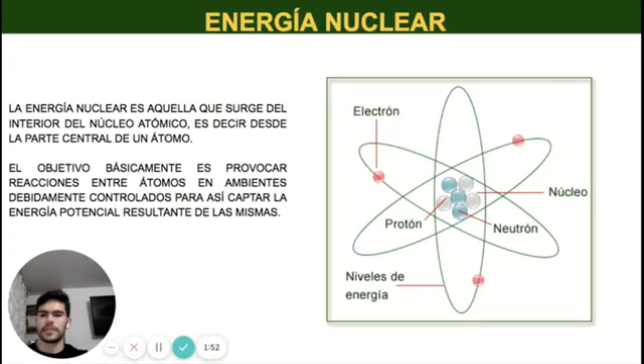When one of these two physical reactions occurs, the atoms experience a slight loss of mass, which is converted into a large amount of heat energy, as the scientist Albert Einstein discovered with his famous equation E equals mc squared.

So the principal characteristic is obtaining generalized radioactive waste, hard to degrade and very harmful. Some of the processing residues have high application in nuclear medicine, radiology, even in high power nuclear weapons. These are known as gamma rays, beta radiation.

Radiopharmaceuticals. However, these industries, such as nuclear medicine, are also guilty of producing nuclear waste with high impact on humans. On the other hand, high-level waste is waste with a concentration of radionuclides such that thermal generation must be taken into account during storage and disposal.

This type of waste is obtained in the power plant. It is removed from the reactor to be temporarily stored in a pool of water built with concrete and stainless steel walls inside the plant to create a radiation barrier and prevent leaks.

In addition, efforts are made to reduce the volume of this residue to the maximum through distillation, evaporation processes, or even by subjecting it to volume reduction by means of external pressure. That is, a volume reduction is applied to its maximum capacity by inducing physical and chemical changes.

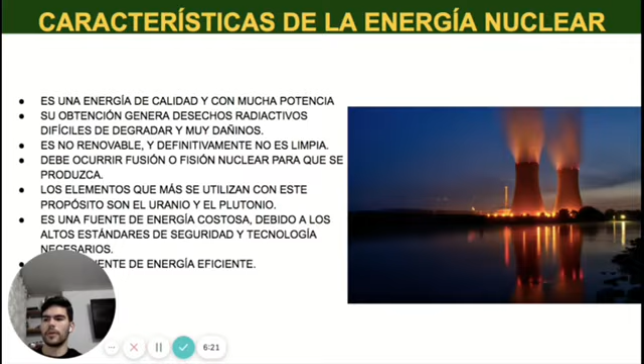All the technology behind a nuclear process is of extremely high value at an industrial level, since the software used for control and in case of emergency of the plant is quite complex. For this reason, it is also a source of expensive energy. Energy classification.

This type of energy usually divides between nuclear energy produced by fusion and fission of molecules. Fusion is the union of hydrogen and its isotopes, which are deuterium and tritium, to form a new heavier element like helium. Fission is the reaction in which the nucleus of a heavy compound is disintegrated by the capture of a neutron, and its division produces two lighter compounds and the production of energy.

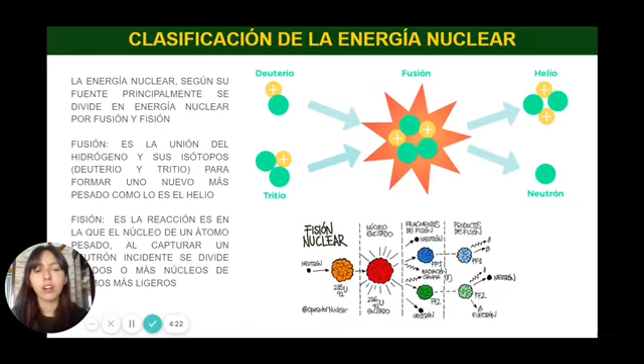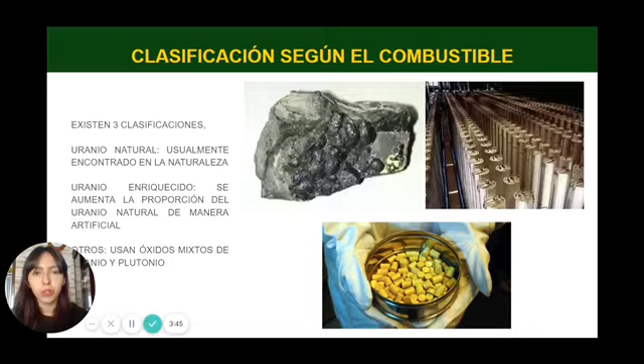The enriched uranium is artificially augmented to approximately 5% concentration of natural uranium. We also find mixes where plutonium and uranium are combined in the form of oxides.

According to velocity, there are two types of reactors. The first is the rapid or fast reactor, which uses a catalyst where activation activity is decreased, and the pressure and temperature specifications are lower than the thermic one. In the thermic reactor, we use the velocity produced by the increase of temperature; it's a slower reactor, but there are many conditions that must be considered when making it.

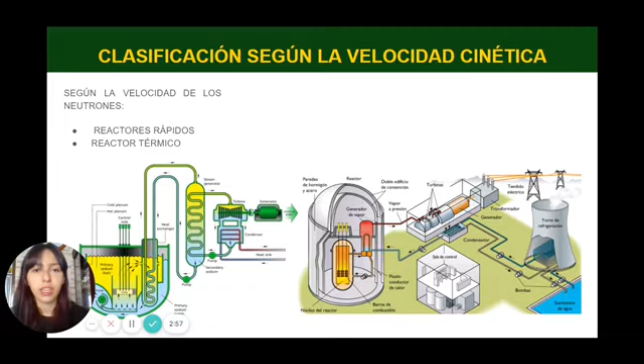According to the moderator or refrigerant, there are three classifications for moderators: heavy and light water reactors, and graphite reactors. For the refrigerant, there can be gas such as helium or carbonic anhydride, and water, light or heavy. These materials can also function as a moderator of neutrons.

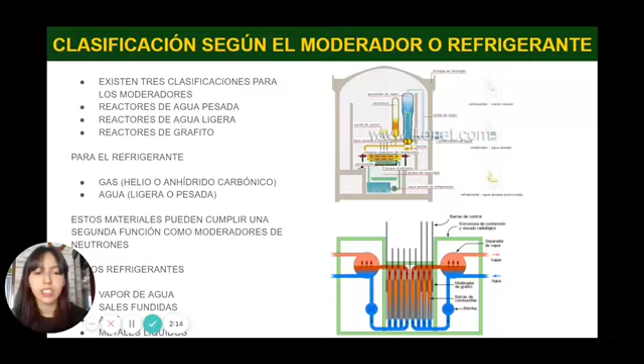For the refrigerants, there can also be gas and carbonic anhydride. Other usual refrigerants are water, steam, molten salts, and molten metals.

The applications of nuclear energy are very broad, but we are going to talk about the five most important. Energy production is the application of nuclear energy that is most exploited, since it is a basic, very essential application today. We also find application in industries, mainly to verify the production process and know what errors can occur.

On the other hand, we have military weapons, which throughout the history of humanity have been deeply developed and perfected.

In the field of medicine, we find the usage of nuclear energy to be very important science, which allows it to be used to carry out diagnostics and treatment of disease.

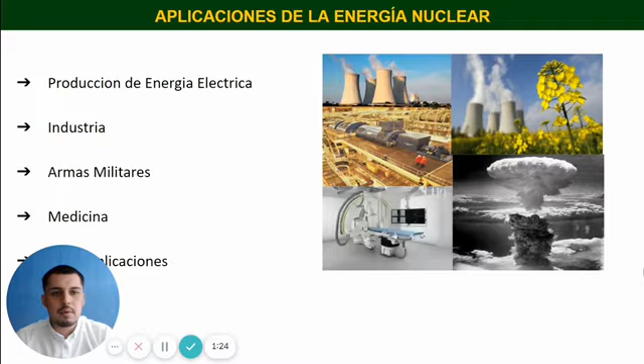Finally, we have other applications, such as agriculture and the environment, where the fundamental use is found throughout the world.

Energy production: a nuclear power plant has the objective of transforming the internal energy of uranium atoms into electrical energy. This process follows the following steps. First, a nuclear reactor generates fission reactions that emit a large amount of heat. With this thermal energy, high pressurized steam is obtained.

The steam, with its pressurized heat, drives the plant's steam turbines. In this way, mechanical energy is obtained from the rotation of the shaft. Finally, that energy is transformed from mechanical energy into electrical energy in the electrical generator.

In the non-renewable part, we refer to an electric generation system using non-renewable energy sources that are used over time without return. Among the sections of non-renewable power plants, there are nuclear power plants and thermal power plants that generate electricity. The thermal power plant, which uses coal or fossil fuels, also takes advantage of the calorific power in the fuel, generating pressurized steam that drives turbines for electric power generation.

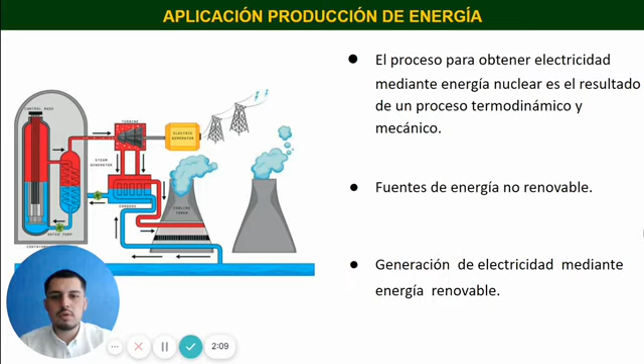Industry application: nuclear technology has acquired great importance in the industry sector, specifically in its use to improve industrial processes, measuring, automation, quality control of raw materials from the industrial process, quality control of mass-produced products, sterilization of single-use products, and tracing of radioactive substances that are introduced into certain industrial processes.

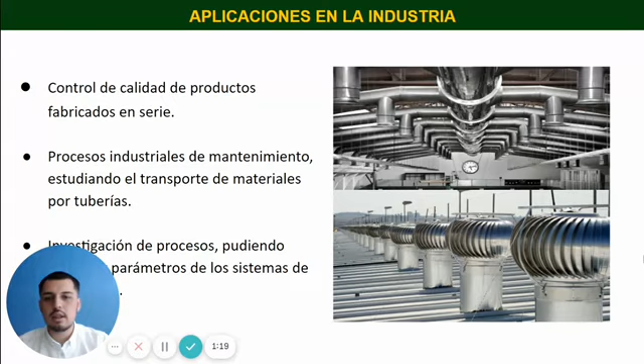This makes it possible to detect the trajectory of the substances and of the radioactive emission. In this way it's possible to investigate various variables of the industrial process, such as flow rates, leaks, and other factors.

Weapons: two types of nuclear weapons can be distinguished depending on the role of nuclear energy. Those that use nuclear energy directly to generate a large explosion, such as the atomic bombs of Hiroshima and Nagasaki. And those that use nuclear energy as a source of energy for propulsion, for example nuclear submarines or aircraft carriers. Throughout history, we have realized the great scope that these weapons have and the damage they generate to humanity.

For this reason, it is important to make correct use of nuclear energy.

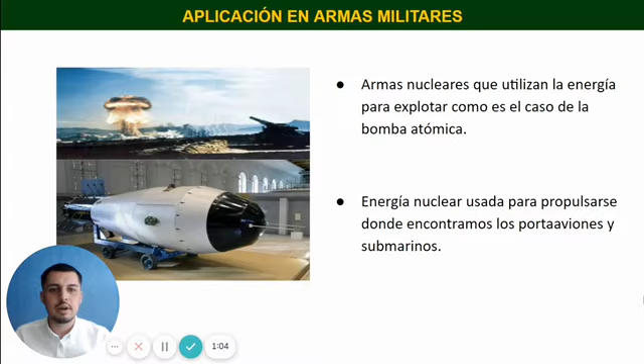Medicine: the application of nuclear medicine is defined as the use of radioactive isotopes and nuclear radiation in the field of medical action, including the following aspects. Prevention: in this aspect, nuclear medicine application involves technologies specific to hygiene, prophylactic and preventive medicine, and radiological protection.

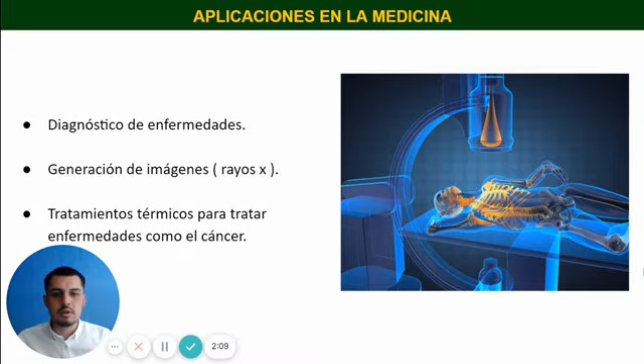Therapeutics: in addition to the important impact nuclear energy diagnostic technologies have on the management of patients, this especially includes the field of specific therapeutic indications using components of atomic and related bioscience technology for prevention, diagnosis, therapies, and medical research.

Other applications of nuclear energy include improving greenhouse effect problems, improving surface and groundwater pollution problems, solving pollution issues, eradication of insect pests, and genetic modification of foods. These are very important sciences, and with scientific advances, nuclear projects have been made in agriculture, allowing more crops of better quality.

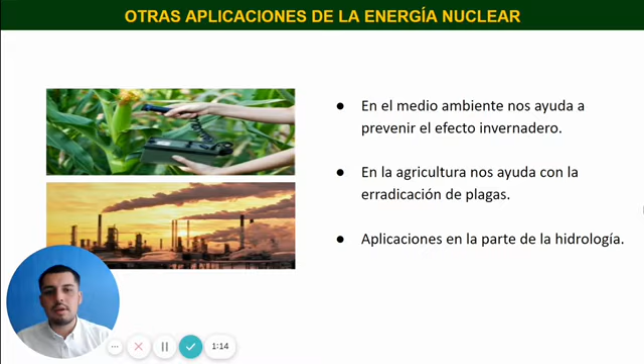We also find isotope hydrology, which helps in understanding the behavior of water and establishing the basis for its rational use. The main isotopes used are for dating, to know the age and transit time of waters.

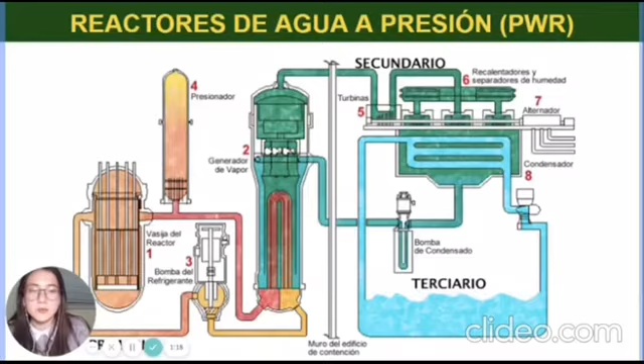In the second circuit, the steam passes through tubes directed to turbines, spinning them at high speed; these are connected to alternators which generate electrical energy. In the third circuit, the steam loses energy and passes through a condenser, which is most often cooled by lake, river, or seawater. Once condensed, it passes back to the evaporator to complete the second circuit.

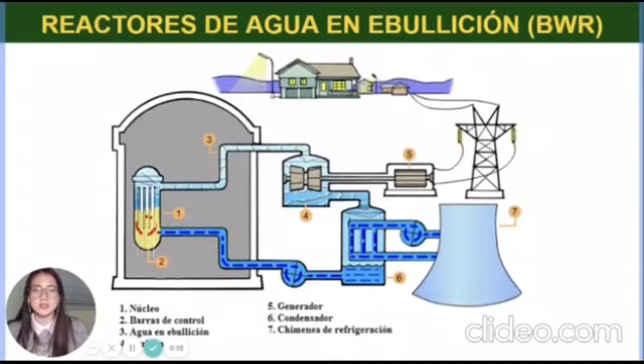Boiling water reactor: the refrigerant is water and the fuel is uranium-235. The chain reaction produced by nuclear fission is used to boil the water, and that steam is introduced into the turbines which drive the electrical generator. The steam then loses energy and passes through a condenser, becoming liquid water, which is recirculated to the reactor by a pump.

Uranium gas and graphite reactor: the moderator is graphite, the refrigerant is carbon dioxide, and the fuel is natural uranium in metal form. It takes advantage of the steam produced by the fission reaction, but its fuel is introduced into tubes made of a material called magnox.

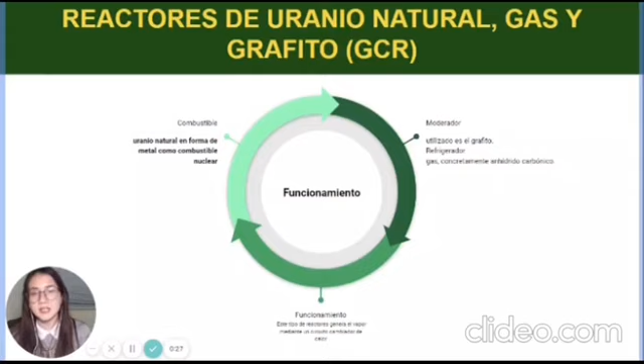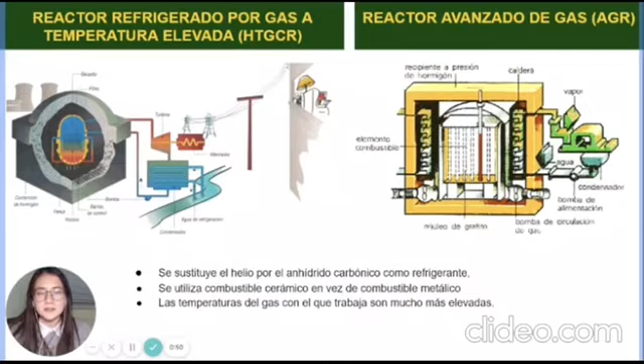This reactor is an evolution of the advanced gas reactor. Its differences are: first, it uses helium as refrigerant; second, it uses ceramic rather than metallic fuel; and third, it reaches higher temperatures.

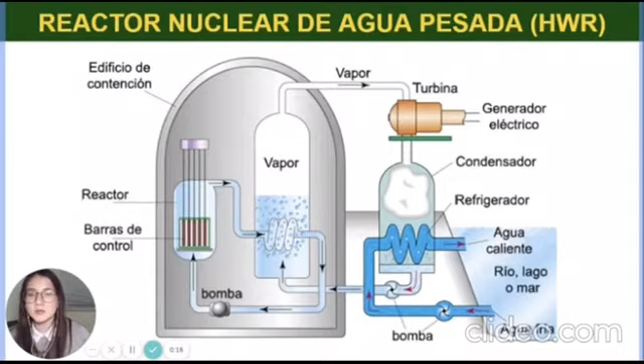Heavy water reactors: the fuel is natural uranium in oxide form, the moderator is heavy water, and the refrigerant is heavy water. The fuel is introduced into zirconium alloy tubes, and high pressure is maintained to keep the moderator liquid.

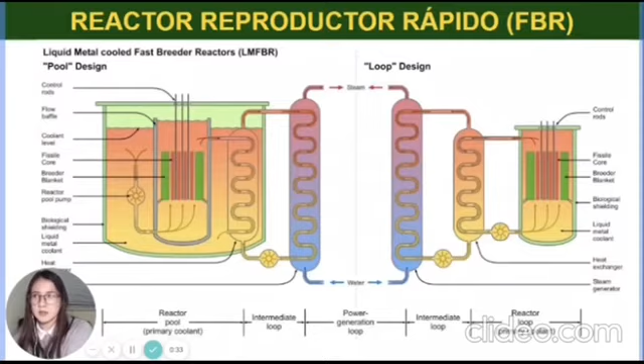Fast breeder reactor: its main characteristic is that it has no moderator, and the refrigerant is liquid sodium. Its fuel consists of two zones: first, fertile zones, and second, enriched areas, in order to convert uranium into plutonium. It has two designs: first, loop, and second, pool. In the loop design, the heat exchangers are outside the tank, while in the pool design, the heat exchangers are inside the tank.

For the last part of the presentation, we will be talking about all the laws involved in the nuclear energy sector. Before we start, we have to delimit the presentation and define what the objectives are and where we're going to go with it.

So we're going to talk really quick about the organism involved in formulating and creating all these different laws for improving the energy sector, especially nuclear. After that, we're going to talk about the national laws involved, the most important ones, because it's a really big subject. And we're going to end up with the last one, the international laws. With that being said, let's get started into business.

First of all, we're going to talk about the organism involved in creating, formulating, improving, and all these policies involved in the nuclear energy sector. Its name is the Ministry of Mines and Energy. This ministry works with the current government right now to get the best laws possible, the best laws they could improve with the companies and with the government. They also formulate the most important, the safety and all this.